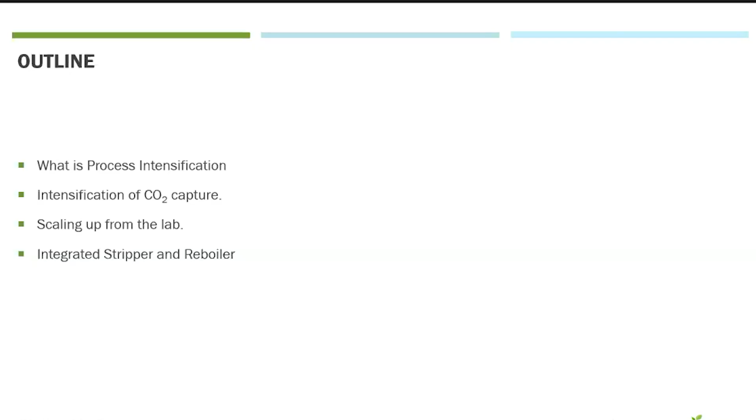I'll start by introducing what process intensification is, then talk in more detail about what a rotating packed bed is, and then about scaling these things up from the lab, which is what we've been mainly involved in doing for the last 8 years. Finally, I'll talk about a technology, which Sakis alluded to, called the integrated stripper and reboiler, where we've brought the regeneration column and the reboiler together.

What's process intensification? It started as an area in a big chemical company in the UK called ICI, which doesn't exist anymore. It was always a technology about reducing the size of process equipment, and the big driver at that point was cost, but also safety. It wasn't long after a very serious incident in the UK, and people were interested in making things more inherently safe. So ICI developed this rotating packed bed distillation system, which they trialed in 1981.

ICI didn't invent rotating packed beds—the first occurrence in the patent literature is from 1913. So it's been invented many times over the years, but they were the first to really scale it up to an industrial process rather than just being in the patent literature.

I got involved probably about 10 years after this development. ICI were always interested in going after this separation, between propanol and ethanol, and were working on designs with multiple rotors. They got to the point where they realized this thing was going to cost a lot more to run and wasn't going to improve product quality. So it did reduce size, did make it more safe, but ICI already knew how to operate the existing process safely—it had to actually improve profitability.

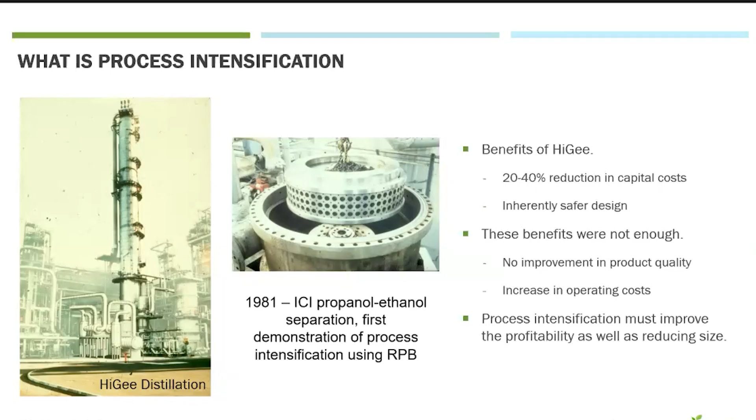So in this context, process intensification always reduces size and reduces capex, which is a really good thing—20 to 40% reduction in capital costs, which you can see easily. This unit sits on the ground, while this unit has a big civil engineering cost associated with it. So you reduce the size, you reduce your cost, but you have to make sure you're not introducing any extra costs when you do that size reduction.

Moving on, you've seen this already—this is a carbon capture process, a solvent-based carbon capture process. If we're going to do intensified CO2 capture, we want to redesign that process to reduce capital and operating costs. We don't want to do just the capital, we want to get at the operating costs too.

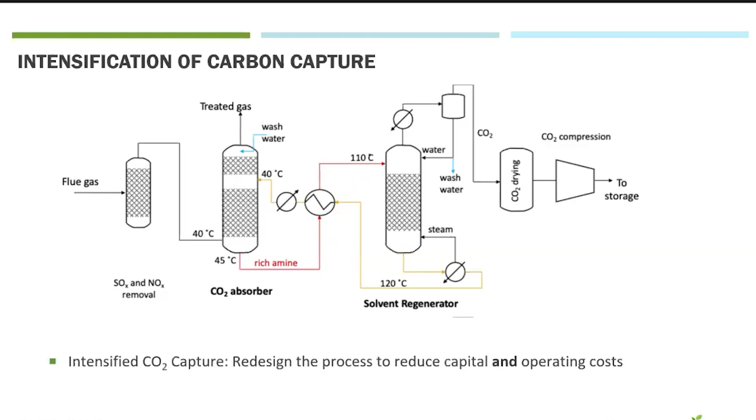I'm going to focus on the absorber and the solvent regenerator. I think James, when he talks from Carbon Clean's perspective, might well talk about some of the work they've done around intensifying all aspects of that process.

So here's our absorber. We have the flue gas coming in at the base of a conventional packed tower and passing up through the packing and then through the water wash section. We have a lean amine coming in below the water wash and flowing countercurrently with the flue gas, and that's where the CO2 capture occurs.

When you want to turn that into a rotating packed bed, you've got to be aware of the direction in which gravity is acting in that system—it's down that column. When you start spinning it, the centrifugal acceleration acts outwards, so the liquid flow has to follow the direction of the acceleration.

And so we end up with this arrangement: we've got packing, the liquid coming in to the center and flowing out, with the centrifugal acceleration causing it to flow radially outwards. We're bringing the gas in at the outside, and there's a pressure drop you have to apply to push the gas in against that liquid flow, and it comes out of the center. So that's a rotating packed bed absorber.

The diameter, or radial depth, of this packing is equivalent to the column height, and the length of this packing along the axis is equivalent to the column diameter. If you want to know how long to make this, you do a flooding calculation at this inner radius, because that's where the gas and liquid velocities are highest.

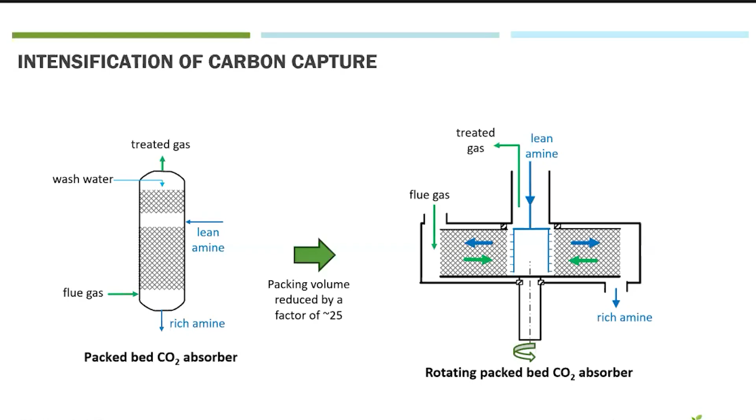The volume of this column is much smaller for a given separation. That reduction in terms of intensification has been known since about 2007. There was a paper published based on work done in Newcastle in 2007, which showed that.

So really, when I came back to this in 2011, for a long time there wasn't actually that much interest in using rotating packed beds for CO2 capture. But then in 2011, the interest started ramping up again.

So we built two test rigs. One's a small 300mm diameter gas absorption test rig where we can run with amines and work out the performance of the unit. And then a bigger 1 meter diameter hydraulic test rig where we can measure the pressure drop and look at flooding.

We used those two bits of equipment to provide information that we could use to scale up these designs. We wanted to go from lab scale to actually something that would capture 90% in an industrial setting. So that was the challenge.

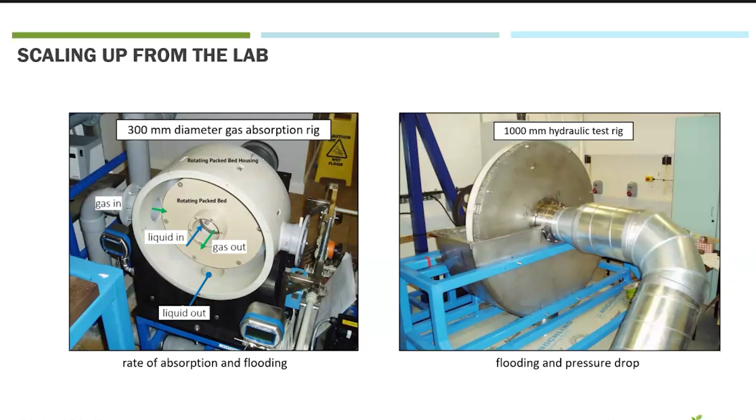In terms of the packings that we use inside, if you scale down your column, you're going to have to scale down your packing as well. We've been working over the years with two types of packing. This packing is basically expanding metal sheets. It wasn't made for the chemical industry, it was made for basically a plaster support. You can actually see some poking through the bottom of that column over there. On the corner is a mesh which looks like that on either side.

We got this basically from building supplies companies. We cut it into circular discs and stacked it, and it has some pretty good properties as a packing, besides being super cheap, which is a good thing for universities. It had good properties - a high voidage and a high surface area.

So we were working with that for a while, and then we had a project called ROLINCAP, which is a precursor to this project, and we worked with Montz, and they developed this packing here, which is based on their vacuum distillation packing. The base material is a very fine wire mesh that's crimped together into a structure like this. This is their A3-750 packing, which has a measured surface area. We measured it using the hydroxide method of 830 meters squared per meter cubed and a voidage of 0.94.

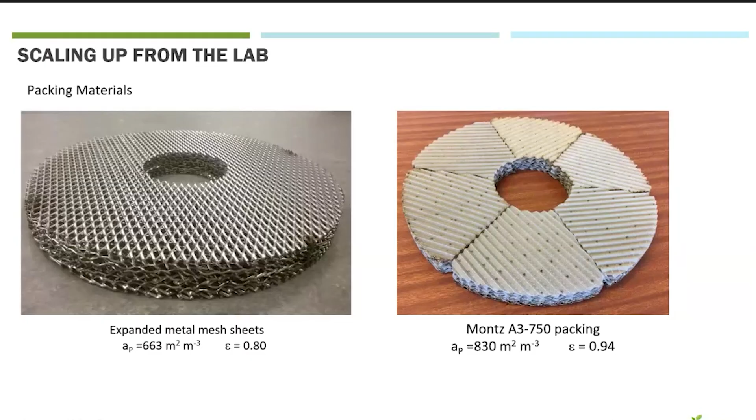Now that's a bit in advance of what I'm going to talk about next. So based on this packing material here, we worked on this project called Project Artemis, and we did this with Carbon Clean Solutions. That was to basically build a unit that was going to capture 1 ton of CO2 per day from an industrial flue gas. So we sized this unit here and built it.

And this is the column behind, which Sakis has already shown. So this is in Glasgow, and yes, it is July 2020. We were allowed to travel from Newcastle to Glasgow to work there because that site was open.

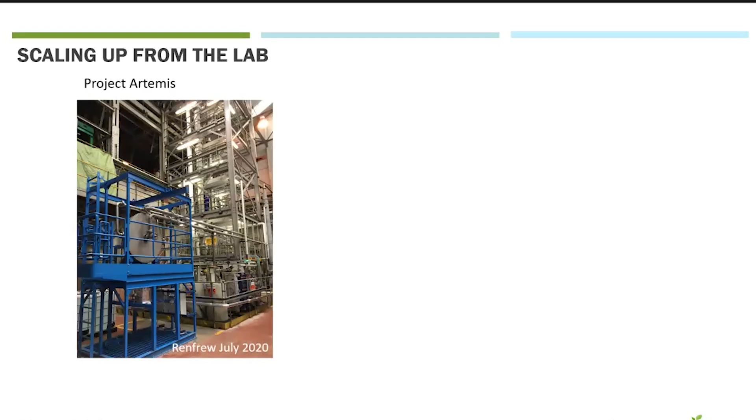And then it was followed eventually 2 years later by the regenerator, which is this integrated stripper and reboiler. I'll talk about that in a bit more detail later. So these two units basically replace everything that you see on this structure there.

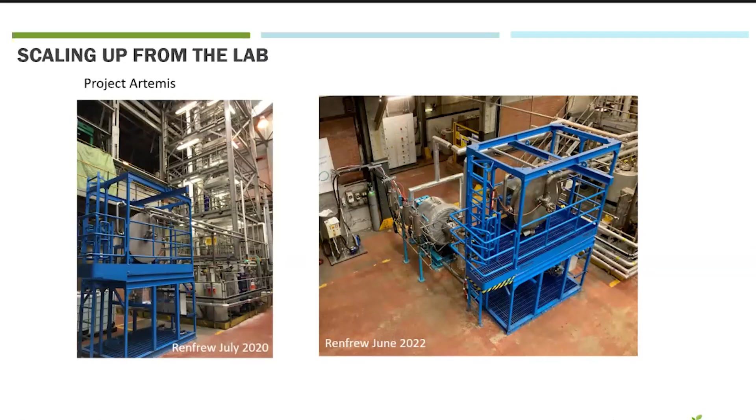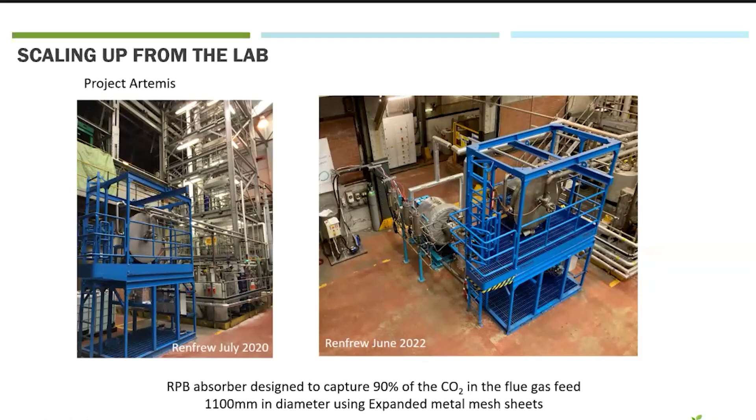So we scaled up from the lab, and I'm just going to go through a list now of things that worked and didn't work in their scale up. So we calculated the inner diameter from this equation proposed by Agarwal, which is based on entrainment.

So if you imagine the gas is coming out of the center of the rotor, and if you make the hole really small, the gas moves really quickly, and that will strip the liquid off the injection nozzles. So if you make the hole bigger, then you won't be stripping the liquid off the injection nozzles. But that isn't the whole picture - that's the reason why that equation didn't really work, because it's not just about the gas being stripped off the injection nozzles.

When the liquid jets hit the packing, there's a certain amount of spray created when they hit the rotating packing, and that is what causes the entrainment of liquid. So that didn't work super well. It was fine, it wasn't a problem. It was quite low, but it was still noticeable that some entrainment was occurring.

The minimum rotational speed, that worked well. Basically, there are two flow regimes in a rotating packed bed. One is where the packing is rotating and the liquid moves through it as rivulets, which is associated with low speed. At higher speeds, that changes into what we call spray and film flow, where the packing is more or less totally wetted by liquid, with some drops flying through. As long as you know what speeds to avoid for rivulet flow, because rivulet flow is a low surface area flow, so you get poor mass transfer, then you're okay. We know this from the work of Burns and Ramshaw. So that worked.

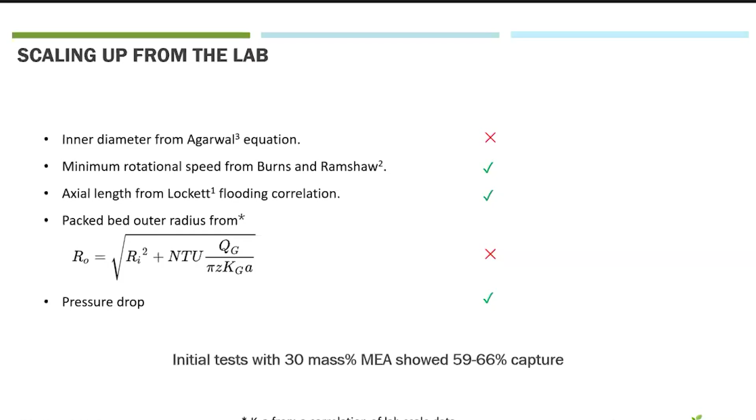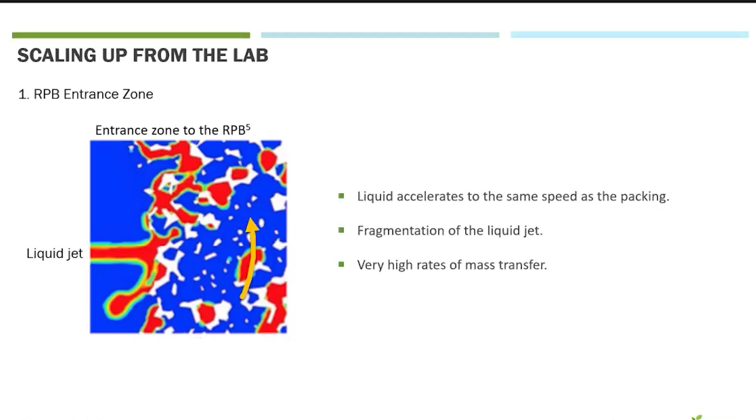The first reason is a fluid flow reason. In a rotating packed bed, the entrance zone is where the liquid jet hits the packing and has to accelerate from having no rotational speed to moving at the same speed as the bed. You can see here, this is a CFD simulation of some packing - you can see the liquid bouncing off it, so that's some of your entrainment issue there. But basically this jet fragments and then goes through the packing, eventually picking up speed, and we get very high rates of mass transfer in that area.

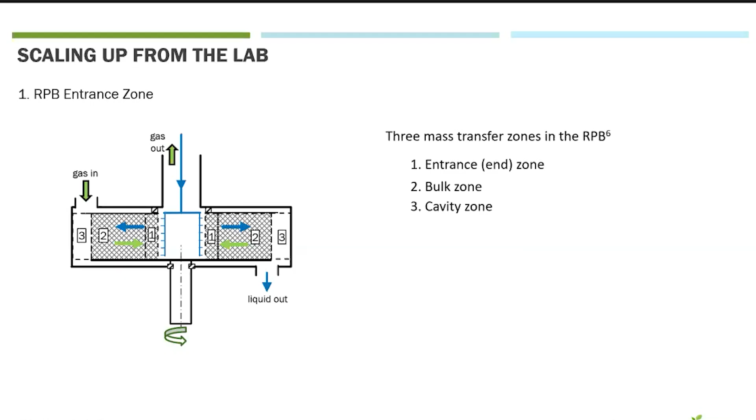The experimental evidence is that the mass transfer rate in the entrance zone is about 4 times the mass transfer rate in the bulk zone. So it's much higher - it could be higher than that. Some people say it's about 6 times as high, but it's significantly higher in that entrance zone than in the bulk zone.

In the cavity zone, the evidence is that the mass transfer rate in the cavity zone and the bulk zone are about the same, maybe a little bit higher in the cavity zone, but that's not fully understood yet as to what's going on there.

In our lab absorber, based on the best predictions as to how big this zone is - this is very recent work, about a year ago - in terms of where that outer edge of the entrance zone is, it's about 9% of the volume of a 300 millimeter absorber.

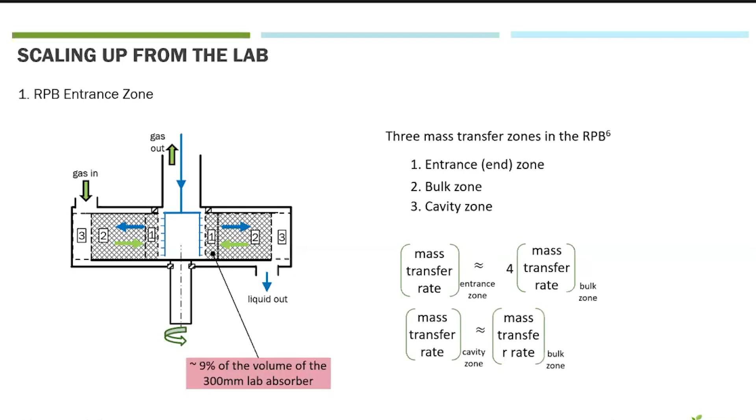Now, the second part of the argument, the reason why it didn't work, is the reactions going on with the MEA. The process for absorbing CO2 is that you get transfer of the gas from CO2 in the gas phase to the solution. Then the amine can react with the CO2 in solution to form a carbamate.

Or it can mineralize the CO2 via the bicarbonate route. The gas transfer is fast. That amine reaction is fast, and those mineralization reactions are slower. They're not slow reactions, they're just slower than the carbamate reaction.

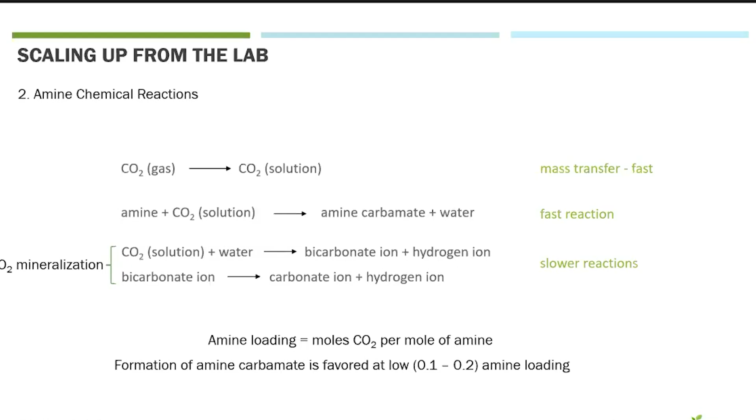The amine loading is moles of CO2 per mole of amine. With MEA, at low loadings, carbamate formation is favored, and we get very high rates of CO2 conversion into the carbamate. When that loading gets to 0.3, 0.4, we switch over to these slower reactions, so we're not absorbing CO2 as quickly. What happened with our scaling up was that we basically used MEA in that 300 millimeter absorber with a very low loading, so we got this dominant carbamate formation.

That 300 millimeter absorber was also influenced by that entrance zone. We had a significant part of the packing operating at a much higher mass transfer rate compared to the rest, and we didn't take account of that. So basically the Artemis absorber was undersized because we measured data under the best possible conditions for CO2 absorption. That's the basic story.

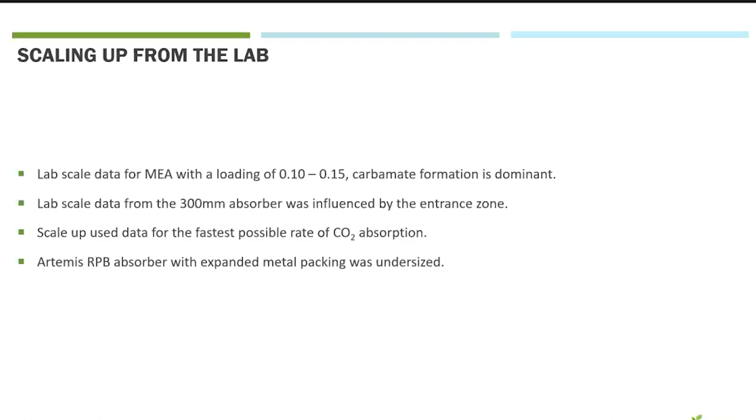But it was an industrial project, so we had to try and make a success of it. Fortunately about that time...

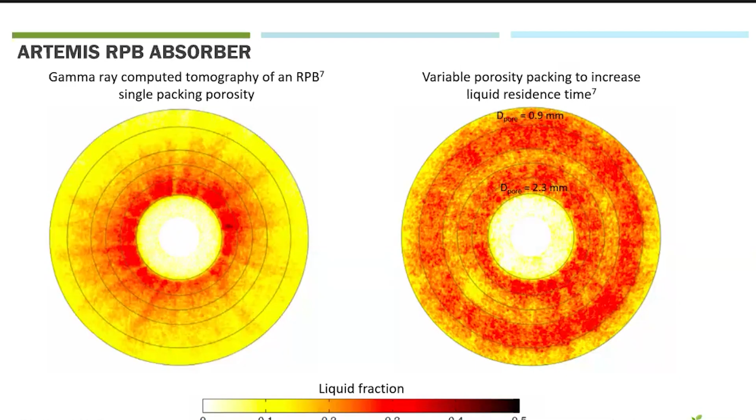We implemented that using packing that Montz supplied, a bed of variable porosity packing. We've not done anything about the mass transfer itself. We've just given ourselves more residence time, because to improve the mass transfer we'd have to increase the size of the rotor, and make a new rotor case, which wasn't an option at that stage.

So really that's the story of scale up. It's understanding why it failed so that we don't do the same thing again.

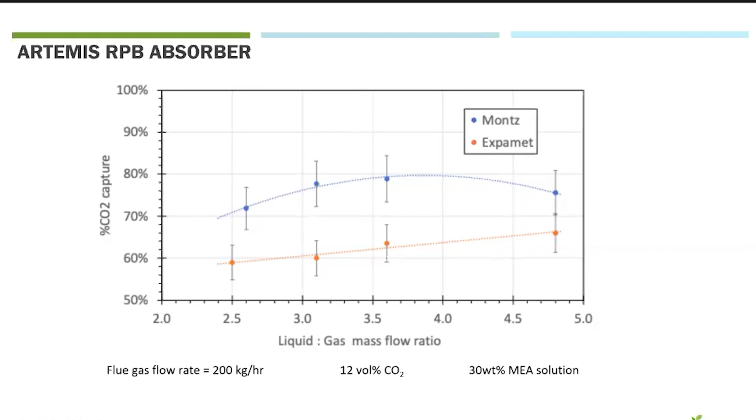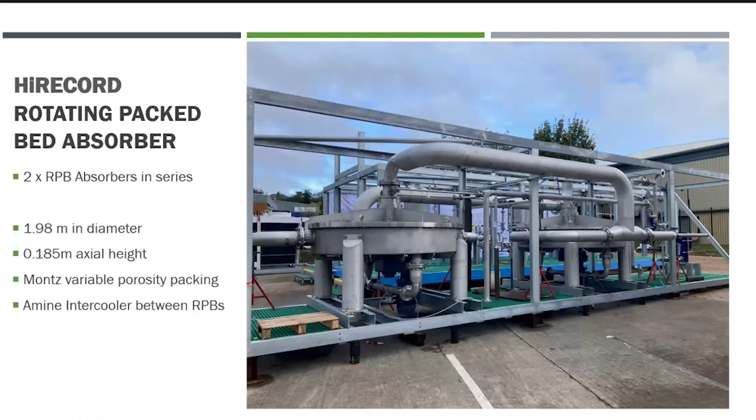So that's the absorber story, much more detail on that because we spent more time with it. We go on to the regenerator.

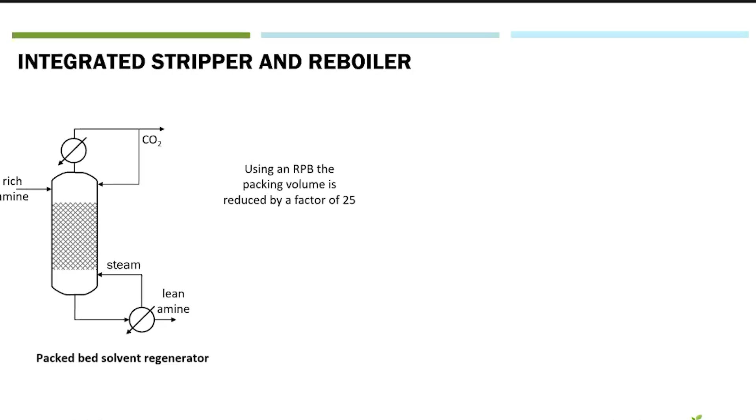So if we can use an RPB to reduce the volume by a factor of 25, then why don't we supply the heat for the regeneration directly to the RPB rather than having a separate reboiler? So that's what we implemented.

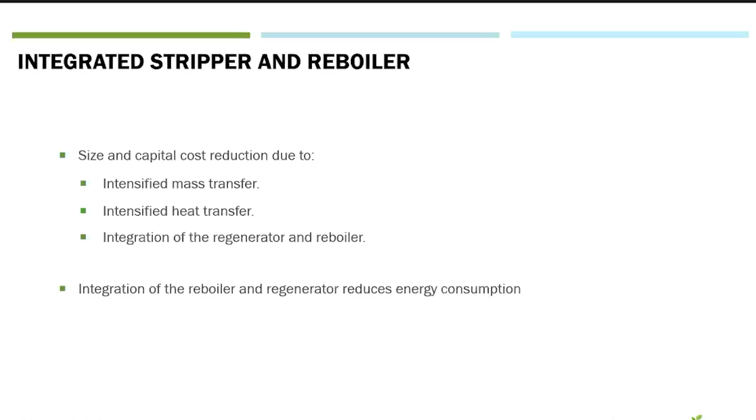So the good thing about the integrated stripper and reboiler is that we reduce size and capital cost because we've intensified the mass transfer, intensified the heat transfer, and integrated two units. We also reduce energy consumption because we essentially reduce any losses that are associated with having an external reboiler.

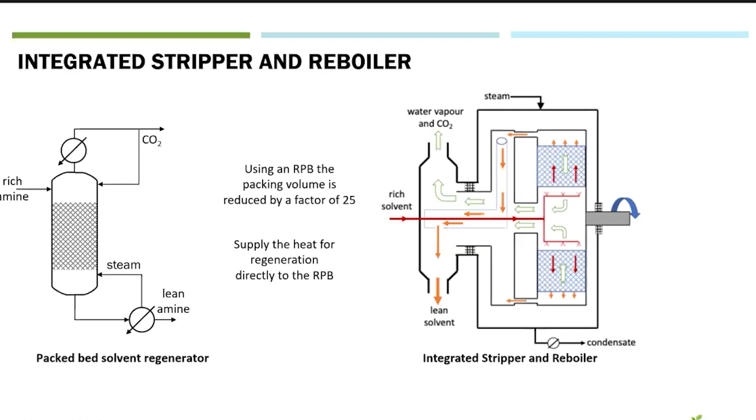We measure the flow of lean amine coming out, measure the flow of condensate, measure the flow of CO2 coming from that condenser, do all the titrations, and with all the temperature measurements we can close the energy balance around that integrated stripper and reboiler.

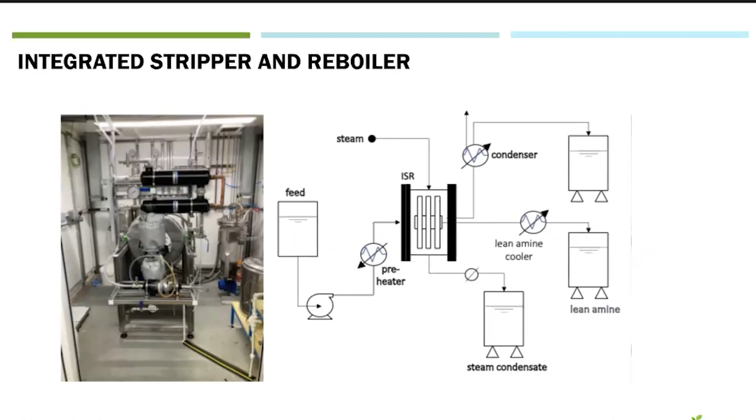So for the heat transfer part first, we've actually measured, without doing CO2 release from the solvent, the rate of heat transfer and generated data for sensible heat transfer and evaporation. It's enhanced when there's vapor in there. So the rate of heat transfer for sensible heat transfer is not that much bigger than it would be in a normal heat exchanger, but when you get the vapor in there, it's very enhanced.

The heat transfer characteristics are very similar to a plate heat exchanger. So this correlation here is actually a plate heat exchanger correlation that we've used straight for the RPB.

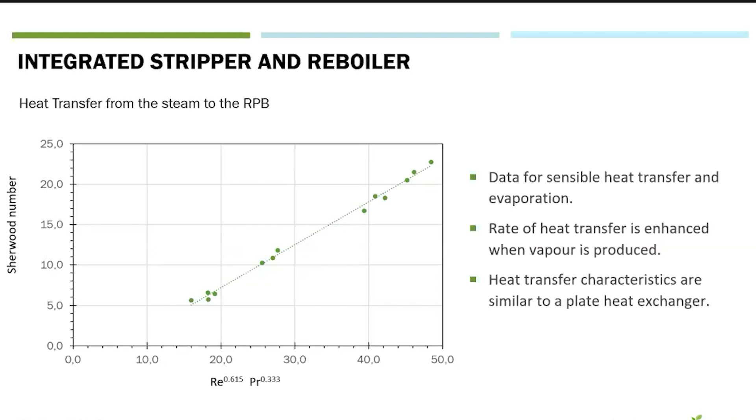And then the regeneration energy - this is the latest data we measured, earlier this year. Basically we were preheating the feed to 90 degrees centigrade before it went in, and that was generating a lot more vapor than we needed. So we got these very high regeneration energy numbers.